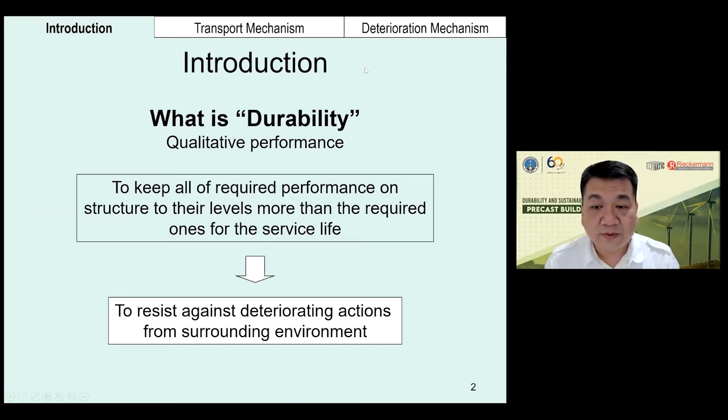So that is my presentation for today, and I hope for a good discussion. My topic today is about the degradation of concrete and steel building. I will start with the term durability. Durability is a term that is used widely, but actually it is a qualitative performance. Durability shows that it is long lasting. To put it simply, it is the ability to resist the deteriorating action from the surrounding environment for the service life of the building, the material, or the system that we want to use.

And this is service life. Service life is the time that we want to use a building, and we want to make the service life as long as possible, but still reasonably economic. The solid line here is the performance that we want to obtain from the building, and the minimum is the minimum requirement for the building. When we use it, there is some degradation, and when the degradation reaches the minimum service requirement, we call it the service lifetime. Sometimes there is premature degradation, so we can repair it. Other times we have to increase the performance of the building, and we call it retrofitting. So this is the common performance of a building during its lifetime.

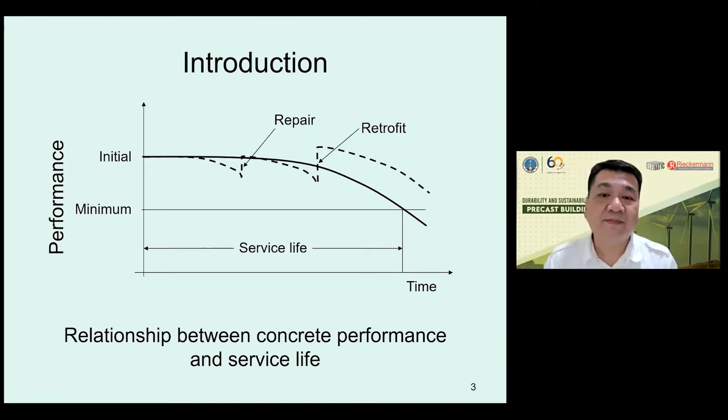Buildings, mainly precast, concrete and steel buildings, are controlled mostly by the concrete. For the steel and connections, including precast connections, we have steel degradation, which I will talk about in the second part. In the first part, I will talk about concrete because it's the main issue. Concrete durability is influenced by two factors: one is internal, from the concrete itself, and the other is external, that is the exposure, such as aggressive agents, the climate, the loading, and others.

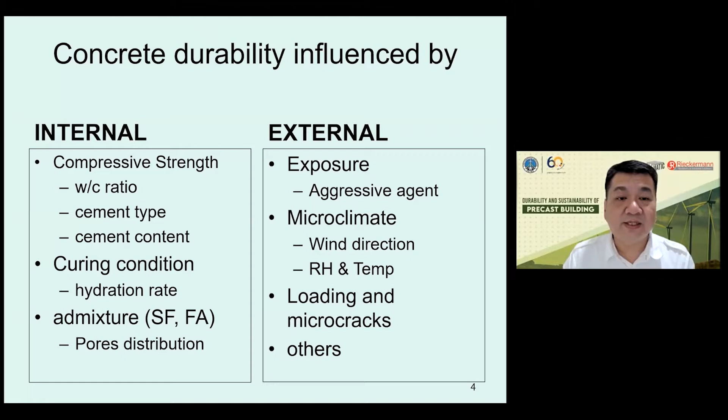This is a very complex interaction. While for the internal factors, it is mainly the compressive strength, because compressive strength is shown to have a high performance in its durability. So we can have a good quality concrete with good strength, with high strength, and then we have good durability. But also during the construction, we can improve the durability by providing a good curing condition and also using some kind of admixture. So this is the basic of what I want to talk about.

And then for the deteriorating action in the concrete structures, or in the concrete member, the concrete member I talk about can be applied to reinforced concrete, precast, or even pre-stressed concrete. So I think it's similar, but with the detail that is different, like the limiting factor. So for the deteriorating action in the concrete member, we have two types of deteriorating action. One is the corrosion of the reinforcement, and this is mostly what we can see in old buildings, where a corrosion stain is coming out of the building. Then we know that the reinforcement had been corroded.

And then the second part that is not so much talked about is the corrosion of the concrete itself. Corrosion in terms of the degradation of the concrete materials. So we have, for example, chemical attack, frost damage, alkali, and then erosion. So this is the topic that I want to talk about, mostly about the basics, so we can prepare our building to resist said deteriorating action.

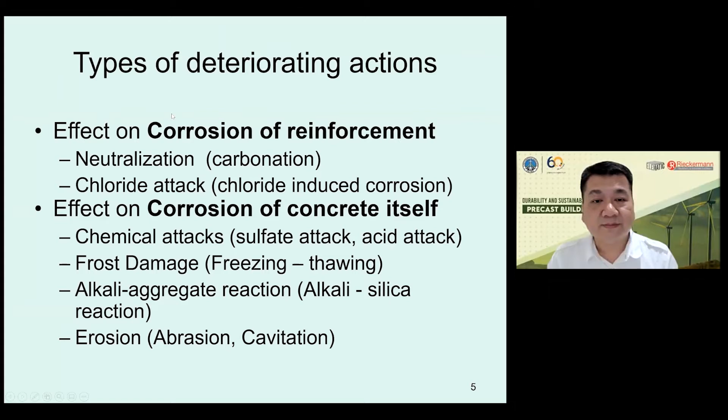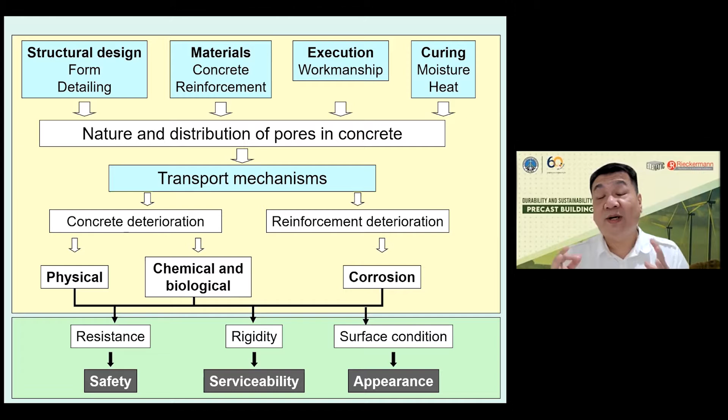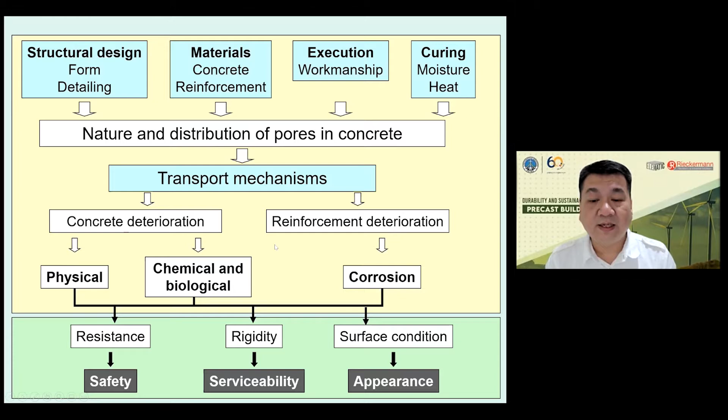When we see the transport mechanism, what we need to imagine is that the concrete is not a solid material. The concrete is like a porous material. So I always say that the concrete is like a sponge, but a very, very hard sponge with many connected pores. And all those pores can be infiltrated by material from outside that can cause corrosion or chemical action or physical degradation. So that is the basic of the deterioration of the concrete structures.

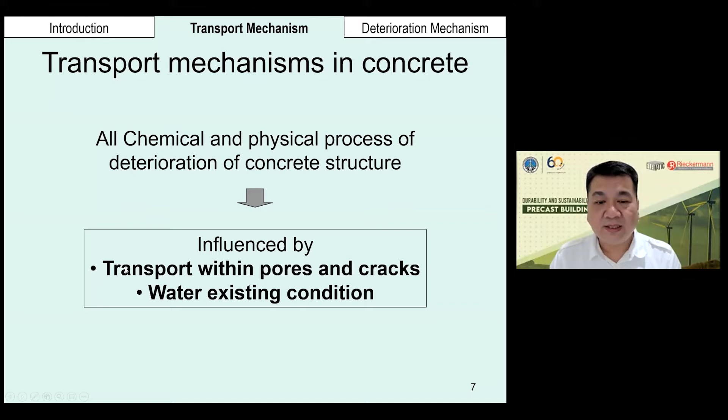Now, for the transport mechanism of concrete, when I say concrete, you can imagine a hard sponge with many pores. The deterioration is normally influenced by the transport within the pores and cracks and the water in the concrete. So just for information, the porosity in the concrete is normally open for a high water to cement ratio. And normally the pores are interconnected. And then 20 to 30% in cement paste, that is the pore in the concrete.

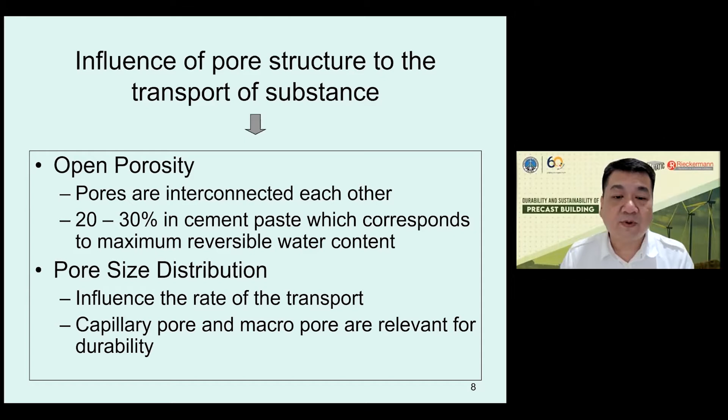And one important thing to notice is the size distribution of the pores. Because when we have a very good concrete, the pores are so fine that the material from outside cannot enter. But normal strength concrete has a larger pore distribution, and the material from outside can enter easily. And this is just the basic for the transport mechanism.

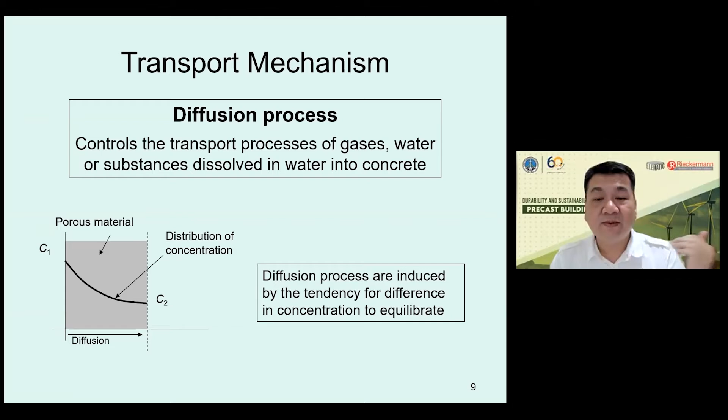We can calculate the degradation process, and there's an underlying equation, that is the diffusion process, but I will not go into detail about it. Diffusion means that there is a difference in the concentration. So the outside concentration is higher than the inside concentration. Therefore, the material will move. The outside concentration could be acid concentration or salt concentration, and it will move inside the concrete and cause degradation in the concrete.

Okay. And the materials that are moving are as follows. Sometimes we have carbon dioxide. It will react with the concrete, and then oxygen also. And oxygen is needed to make steel corrosion occur. So steel, oxygen and water are the main governing process of the corrosion.

And the water always appears because inside the concrete we also have water. Outside the concrete there's water vapor. So this is the transport mechanism in the concrete. This is just

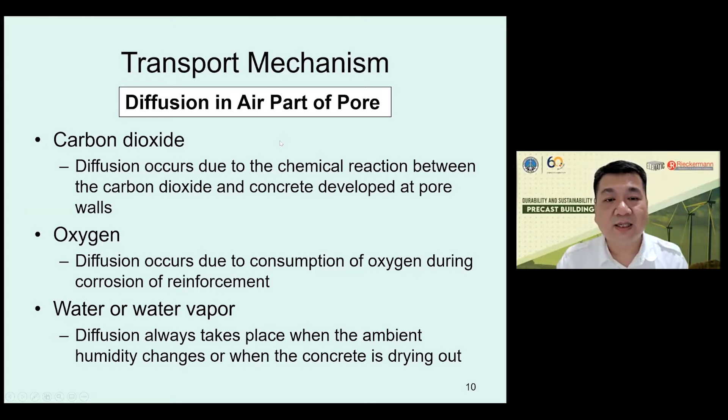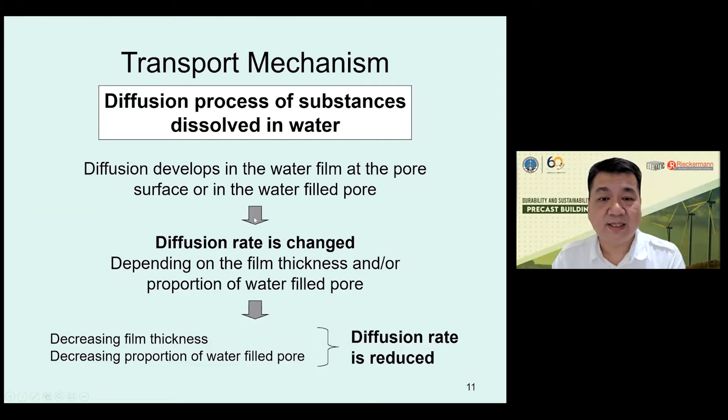information. So the material can be controlled by changing the diffusion rate. The diffusion rate can be changed by making the concrete quality better. So this is just basic knowledge. And this is just a theoretical analysis.

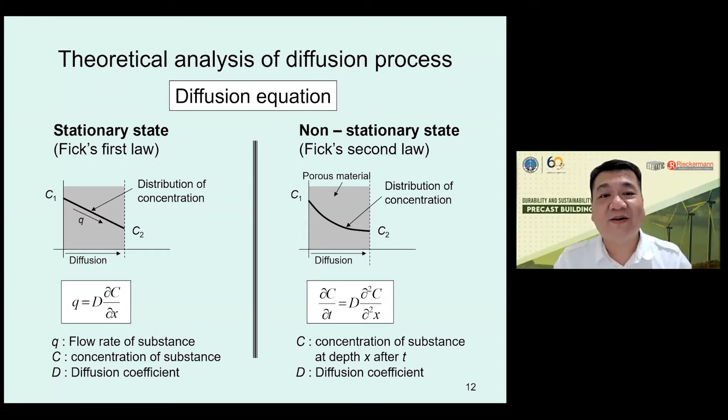So I'm just showing that in the diffusion process, there are two conditions. One is the stationary state, and the other is the non-stationary state. We will use each one depending on the problem that we will face. But yeah, this is still some background of the deterioration action.

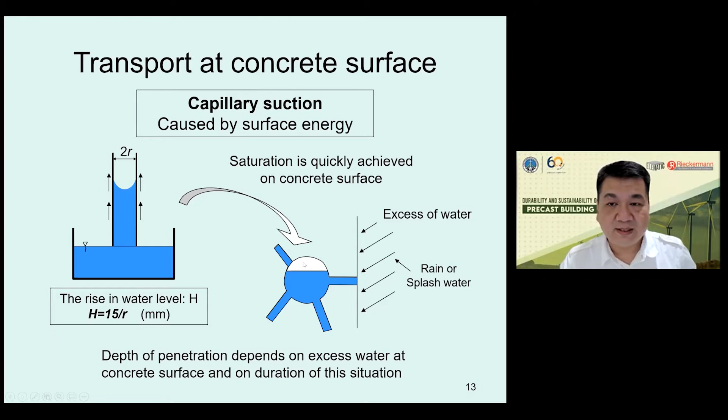So another thing is that the concrete is also like a sponge, so it will soak up material from outside, and it's controlled by the capillary suction. So the capillary suction shows that when you have a dry internal part of the concrete and then there's some water, the water will be sucked by the pores in the concrete. So this is also one transport in the concrete.

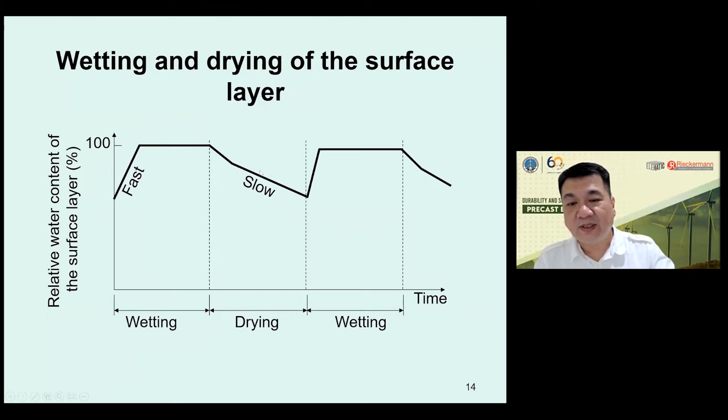So yeah, and then this is the example for the process of drying and wetting. So we have time, and when the concrete gets some water from outside, maybe from rain or from splash water, the wetting cycle is very fast. And then when it's dry, the water will be released slowly. This is an example of that.

So yeah, I want to say that the transport of material in the concrete is a complex process. There is capillary suction, there's hydraulic pressure when there's water outside of the concrete, and then there's evaporation, so there's water transport in the concrete. And that is the process occurring in our concrete. So there's pores, there's diffusion, there is some capillary suction, and then there's some moving of water.

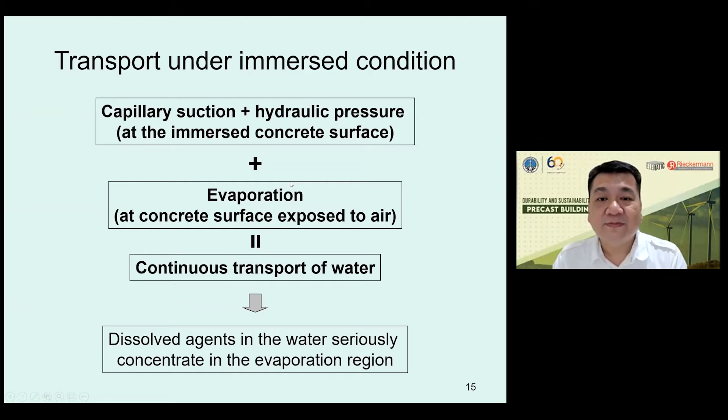That is our concept for our buildings. Even though there is no deterioration, this kind of transport is still occurring in our concrete structures, regardless whether it's precast or cast in situ concrete. So that's what I wanted to talk about. That is the basic for the movement of material in the concrete.

So the next part I want to talk about is the deterioration of rebar in the concrete. When you are faced with durability issues in concrete, this is actually the main factor. The rebar in the concrete is said to be durable, but only up to some time. So this is the deterioration mechanism.

So for new concrete with reinforcement, normally the reinforcement is protected by the concrete. The passive film is like a layer on the reinforcement surface. Due to the high alkalinity of the concrete, we have the passive film. The passive film normally protects the reinforcement from corrosion.

But sometimes the pH of the concrete is reduced by the action of carbonation and leaching out of alkalis, and also chloride contamination can destroy the passive film. So with the availability of water and oxygen, the corrosion of the reinforcement will start. Then we have two types of degradation: one is the reduction of the cross-section of reinforcement, and the other is the cracking and spalling of the concrete. Overall, it will cause the degradation of structural performance.

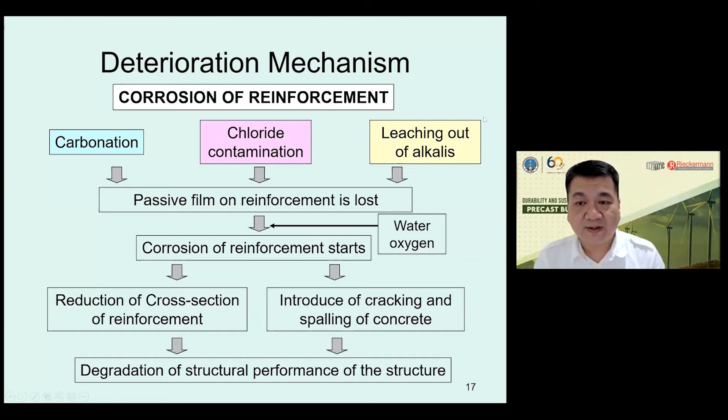So this is the mechanism for normal reinforced concrete buildings. We have carbonation, chloride, and leaching out of alkali. So I will explain carbonation. What is carbonation?

When you have concrete, normally the cement reacts with water, producing C-S-H gel, calcium silicate hydrate gel, and calcium hydroxide solution. The calcium hydroxide is very high in alkalinity, so it protects the reinforcement. And when carbon dioxide penetrates into the concrete, it reacts with the calcium hydroxide, producing calcium carbonate and water.

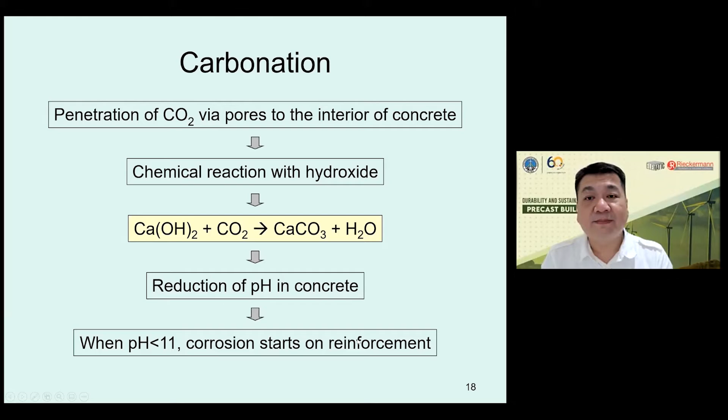With the reduction of the calcium hydroxide content, the pH in the concrete will reduce. And when the pH is less than 11, corrosion will start on the reinforcement. So this is the basic of carbonation. We can calculate the carbonation depth in the concrete with time, depending on the quality of the concrete materials. Normally, the equation follows this type.

Y is the concrete cover, K constant times the square root of time. So we have two conditions: indoor and outdoor, because indoors we have a higher concentration of carbon dioxide. So this is the indoor condition.

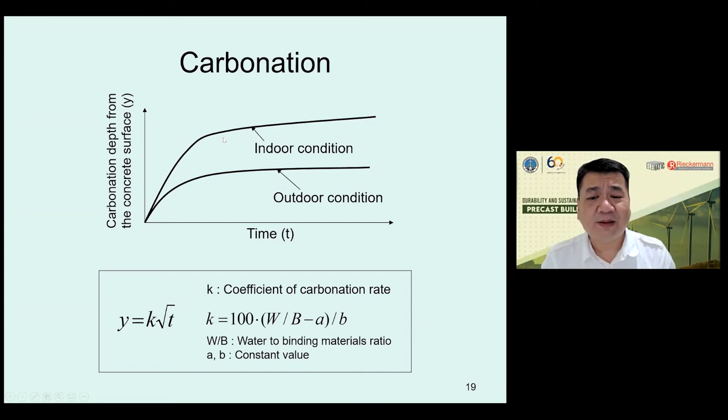So the carbonation can enter more rapidly into the concrete. When the pH is less than 11, the reinforcement will lose its protection and start to corrode. So this is the basic of carbonation.

The distance from the concrete surface is normally called the concrete cover. So when the pH is reduced, meaning on the left part where we have rebar, it will lose the protection of the passive film and can start to corrode. So this is the process of carbonation.

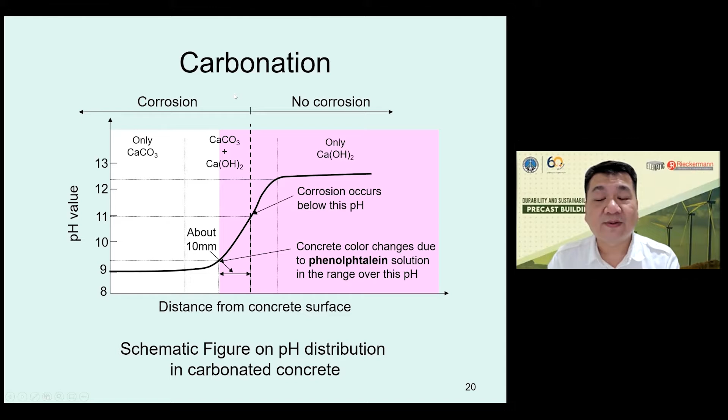Now we can detect the carbonation of concrete using phenolphthalein solution. We spray it on the concrete. When the concrete changes color to pink, it shows there is calcium hydroxide present, meaning this part is still relatively high pH, while the outside is already lower pH. So this is the carbonation.

So when the reinforcement is on the pink side, 1 centimeter from the pink side, showing that the concrete is not yet carbonated, the reinforcement can still be protected. When the reinforcement is on the non-changed color side, we can say that it is not protected by the concrete, and corrosion can start to happen.

Now, another degradation is the chloride penetration into the concrete. The chloride source normally is from seawater or de-icing salt. Chloride is actually a very deteriorating agent in steel. We have steel structures and also reinforced concrete. When exposed to seawater, degradation is normally very fast due to the chloride effect in the process.

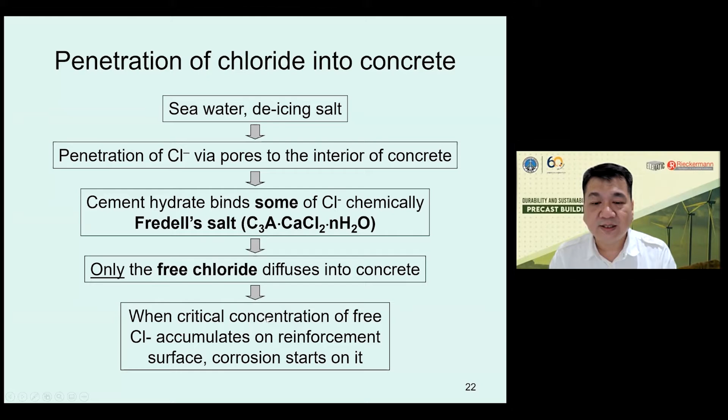The chloride diffuses into the concrete, and when the critical concentration accumulates at the reinforcement, corrosion will start. Different from carbonation, chloride penetration penetrates faster, but we can only find chloride in the marine environment, and maybe in some countries using de-icing agents. The penetration rate of chloride uses Fick's second law.

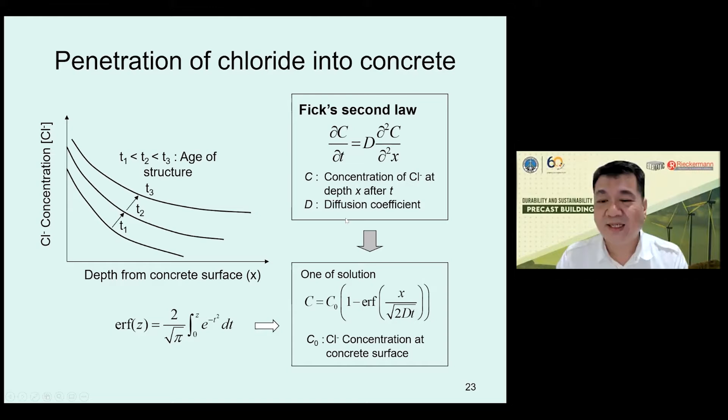This is some theoretical background, just for information. One thing we need to understand is that chloride will cause degradation in the reinforcing bar when it reaches its critical chloride content. There's a standard, the Japanese standard, saying that 0.4% of chloride related to the cement weight can cause corrosion in the reinforcement.

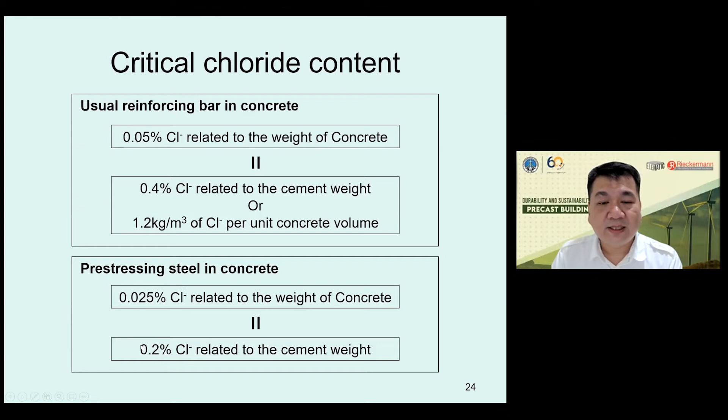This normally translates to maybe 20, 30, 40 years of exposure time. For pre-stressing concrete, it is even lower, the concentration needed to cause corrosion is lower. So this is some information about when the corrosion of the reinforcement occurs, in this case the chloride enters into the rebar.

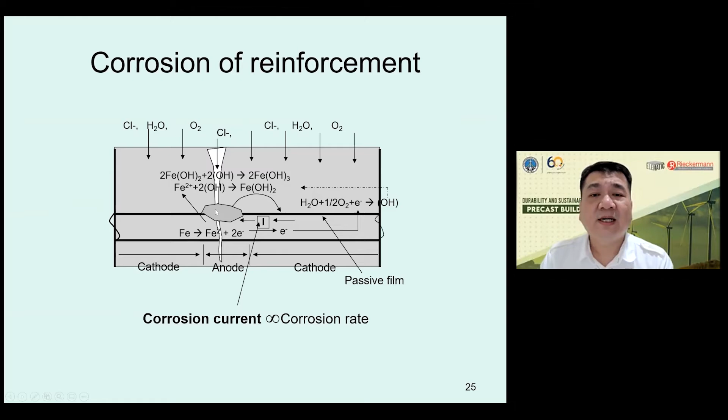So this is the corrosion condition. We have anodic condition and cathodic condition. There's a movement of electrons, and then the rebar will start to corrode. So this is the basic of the degradation of the reinforcement in the concrete.

When corrosion is occurring, we have the steel, and then it will expand. The expansion is due to the change of phase in the material. It normally changes into ferric oxide, and the rust that you see with the red color is normally Fe2O3 with water elements, and it has 6 times the volume.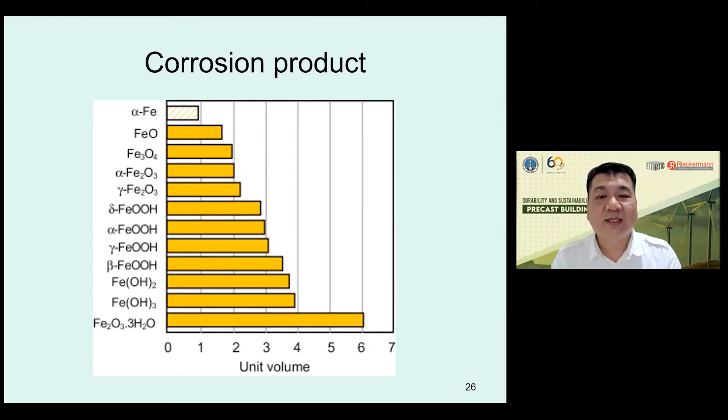So 1 millimeter of steel reinforcement that is corroded can change to 6 millimeters. It's expanded so much. This is actually the cause of why the concrete spalls, why the concrete cracks, because of the expansion of the rust. When corrosion starts, the rust expands, and our concrete will have tensile stress. When the tensile stress is higher than the tensile strength of the concrete, it will crack.

The cracking has two conditions: one is with thin cover, it will spall, and thick cover just cracks, and the rust will come out from that part of the concrete. So we see the basic of deterioration is like this.

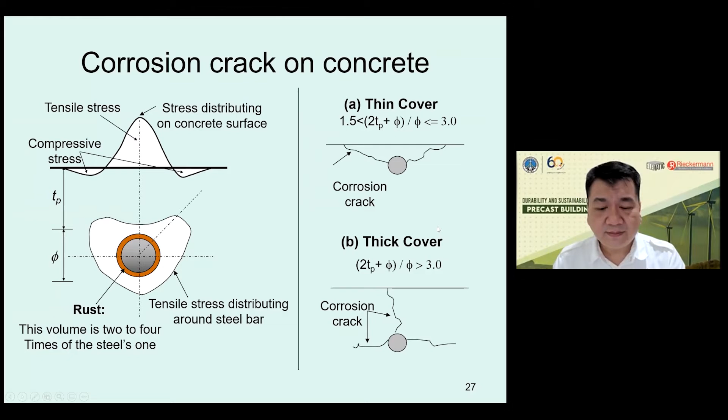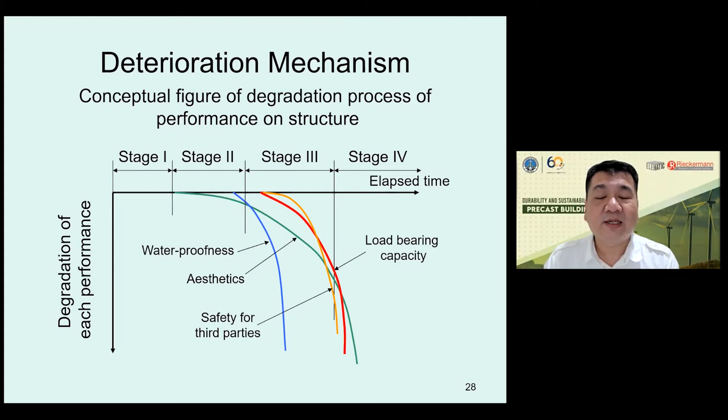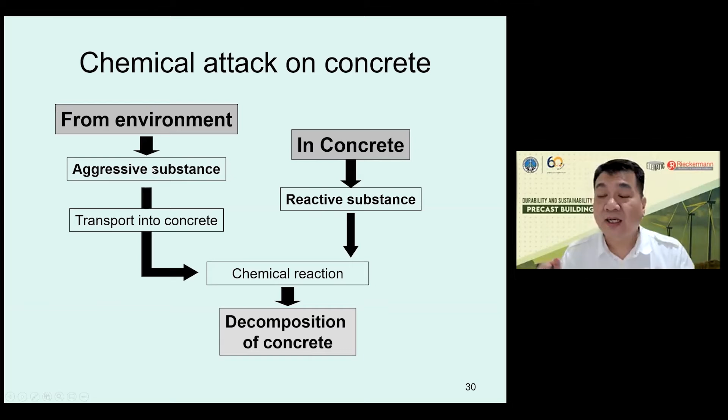Now the second part is the deterioration of concrete. Actually concrete deterioration is quite straightforward: we have attack from the environment and also problems in the concrete itself. When the concrete has some reactive substance in the beginning, degradation will occur - I will show you later. From the environmental side, normally it's due to aggressive substances that transport into the concrete and cause chemical reactions, which is the cause of deterioration. We understand chemical attack on concrete quite well now, so we try to use good quality material and limit the aggressive substances reaching the building. This is the knowledge you need to prepare your building.

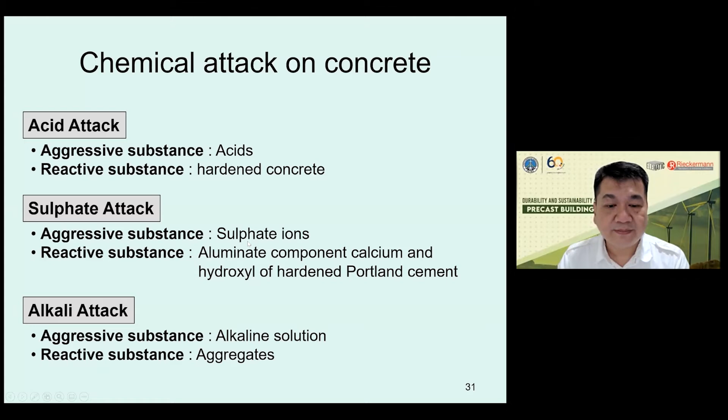When chemical attacks happen on concrete, they can be divided into the following conditions: acid attack, because acid is also a good agent to destroy your building - the reactive substance is the hardened concrete, meaning the whole concrete part will be destroyed by acid. Another is sulphate attack - sulphate comes from seawater, and some soil also has sulphate. Sulphate attacks the aluminate component in Portland cement, so aluminate reacts with sulphate. The other is alkali in the concrete reacting with the aggregate.

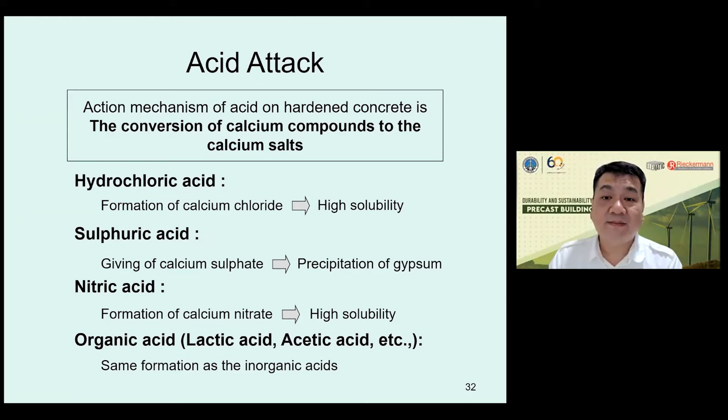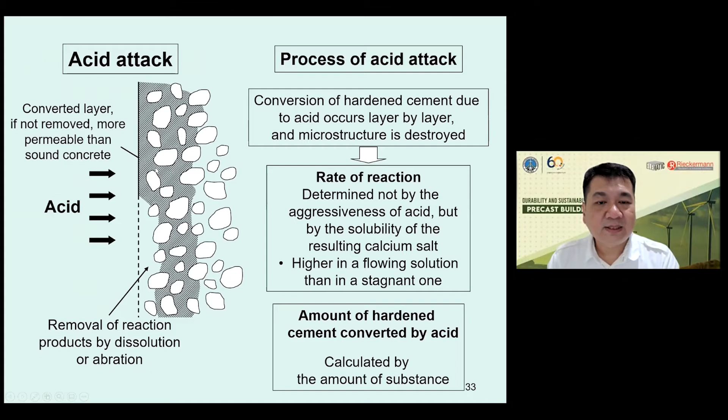For acid, there are many types we need to understand: hydrochloric acid, sulfuric acid, nitric acid, and organic acid. Normally buildings face organic acid from oil spills, and other acids like cleaning solutions also fall in this category. These convert the calcium compound of the reacted cement into calcium salt. This is the schematic - acid exposed to our building will convert the entire layer of hydrated cement. This is the acid attack.

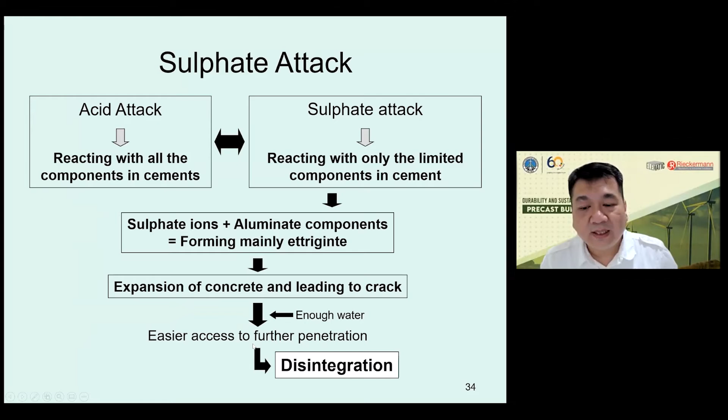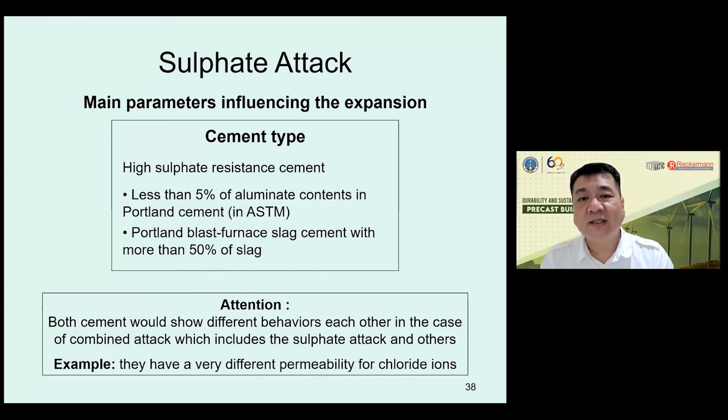This is actually the basis for cement used in the marine environment. The limiting factor is the water to cement ratio - we reduce it to 0.5, which is the Japanese standard. So this is sulphate attack, and then cement type matters too. Sulphate attack is a degradation factor in concrete because for acid we try to protect against it, but for sulphate, we still have buildings exposed to it.

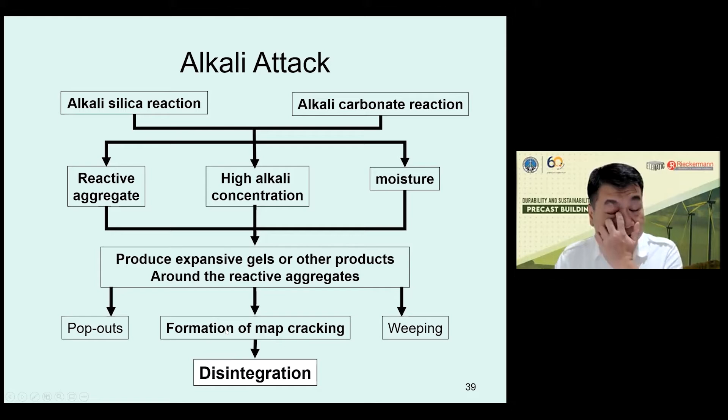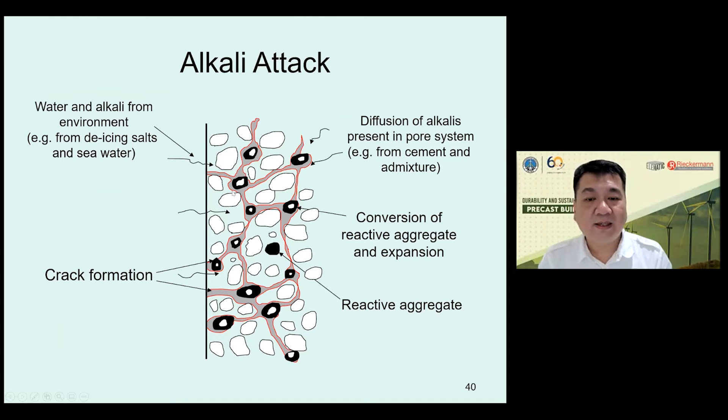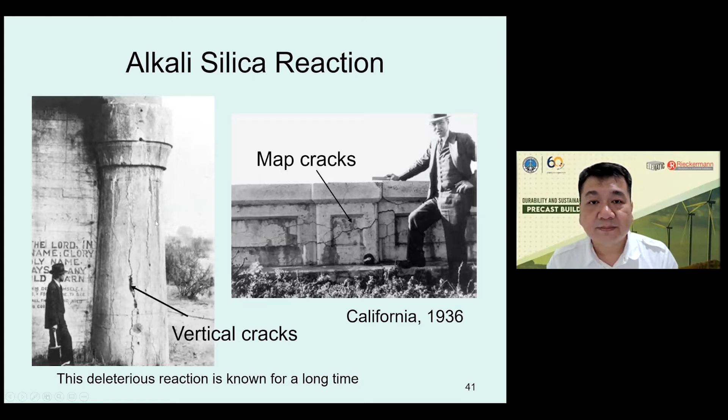For alkali, we have alkali-silica reaction. Silica means the aggregate contains silica, and carbonate means the aggregate contains carbonate, like limestone. With reactive aggregate, high alkali concentration, and moisture, it will expand and cause map cracking in the concrete. The process is like this: when alkali from inside the concrete reacts with the aggregate, it expands and causes cracking. Alkali-silica reaction is a very old condition because we have many concrete structures that have this cracking. This kind of map crack is the alkali-silica reaction - there's also some leaching of alkali in the cracking.

So that is the deterioration of concrete. Now, for the steel structure, this is quite common - from the steel structure we can see the connection with the precast, like the joint of the precast member, mainly using steel, so it's also related to steel. For steel superstructures, there are many typical damages: deformation, distortion, collision, connection damage, and tightness issues. This is related to the steel design, the construction, and the maintenance process of steel structures - mainly mechanical damage. Another part is the coating, when we coat the steel with some paint.

Another steel corrosion protection method is galvanizing. So galvanizing is also some kind of corrosion protection.

When we use the building, we have the fatigue condition. Fatigue is like the cyclic loading in the concrete, and we also have a fracture condition with overloading and cracking. Cracking is similar to fractures.

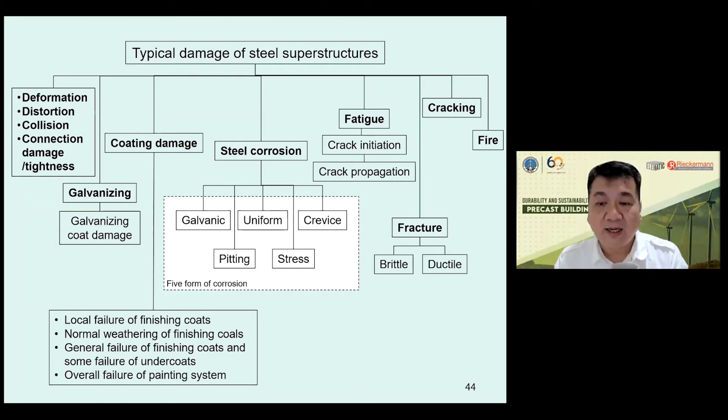So there are 5 types of corrosion: uniform, galvanic corrosion, crevice, pitting, and stress. I think the ones most related to precast structures are galvanic corrosion and crevice. Crevice is the corrosion occurring on the unprotected part of the steel. I will explain it later.

For the coating, this is also related to precast, I think. Normally for the steel building, we see a local failure of finishing, meaning scratches or some impact will make the finishing fail. Normal weathering is fine because then we can just reapply the finishing, but there's also some failure of the painting system.

There are some tests also to check this. It's called the holiday test. Normally we use some sensor and check if there's any exposed surface.

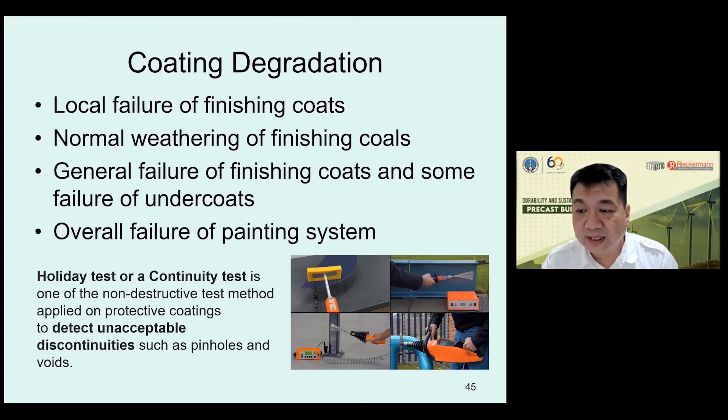For uniform corrosion, we can protect it using coatings, plating, galvanizing, or anodizing, or using corrosion inhibitors, or even using anodic protection. Or we can just increase the thickness of the structural member.

Then there's pitting corrosion, which is when localized corrosion occurs and causes damage deeply inside the steel, causing holes. There are many types of corrosion, and normally due to the process of making the steel, the process is not quite uniform, and you get some local condition. So the material needs to be selected very well.

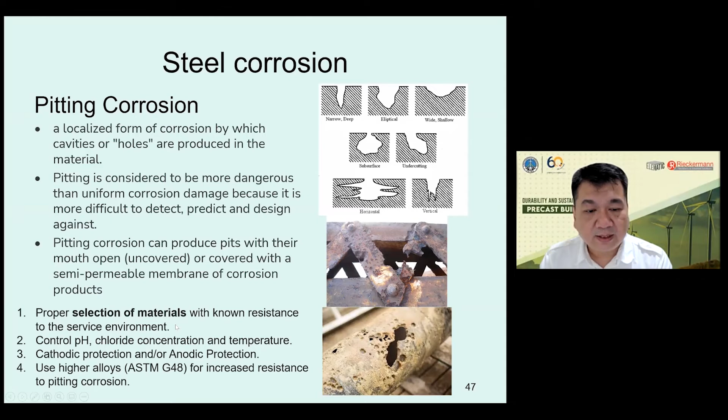For stress corrosion, we hardly see this, but it's knowledge we need to know. Stress corrosion normally occurs on the tensile phase of the steel, and when tensile stress is occurring, aggressive substances can enter the steel and cause corrosion. It also occurs at high temperature, so for boilers, stress corrosion normally occurs.

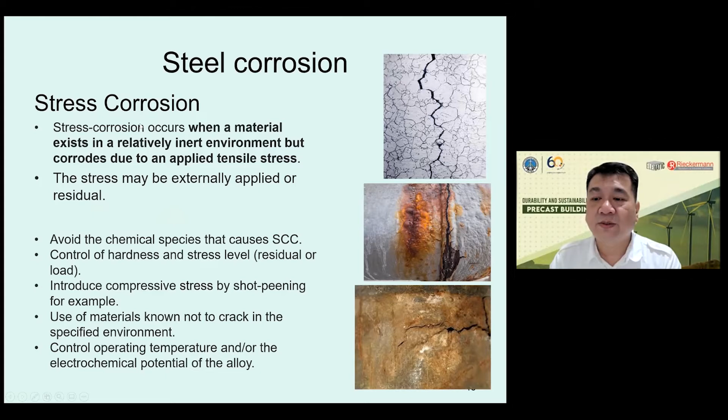For precast connections, I think the one we need to pay attention to is crevice corrosion. Crevice corrosion is the condition when there's some shield or plate outside of the steel. This occurs because when we have a condition protected from the outside, the water there cannot dry out, and with some salt, it causes a very high acidic condition and pitting. So this happens when we have two parts of concrete or steel plate with a gap between them - water can enter and corrosion can occur.

This is the most important corrosion process, I think, in our steel and concrete connections. That's why we need very good filling material and grouting, so we can avoid the occurrence of water pooling in this part. We need to fully drain it, which can reduce the corrosion.

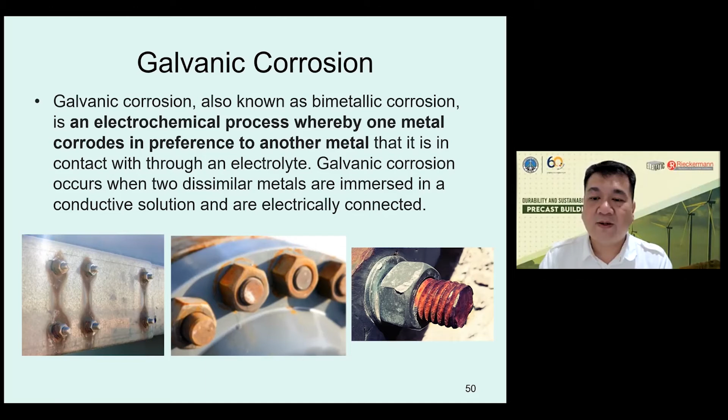So I think for the precast member, the galvanic corrosion needs to be considered very well, because different types of metal will have different corrosion potential. Of course, this condition occurs when there is water and oxygen. So one thing that we are trying to do is also ensure that our connection doesn't have water and oxygen by filling the connection with grouting. So that is called the rigid connection.

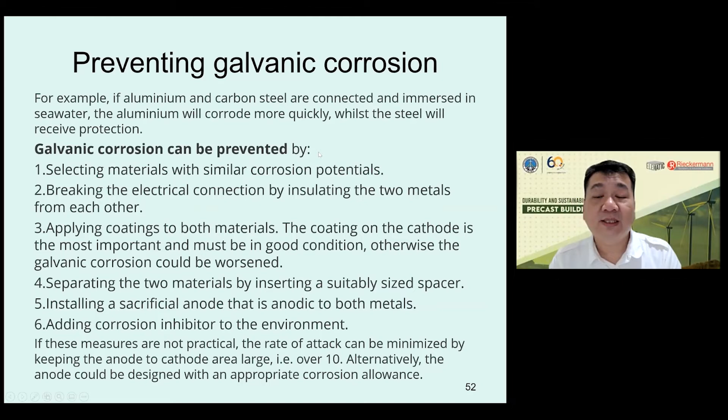Yeah, for galvanic corrosion, we can prevent it by using a material that has similar corrosion potential, or breaking the electrical connection. So we have to separate using some plastic, coating, spacer, and the like. Or we can use a sacrificial anode, or corrosion inhibitors. So yeah, galvanic corrosion, I think, is main knowledge that we need to have for the precast concrete connection.

So I think that is my presentation. And to recap, durability is a factor we need to consider besides strength and workability when we are making a good building. And then internal and external factors need to be considered. And the mechanism of degradation we need to understand so we can make good concrete. I think that is my presentation.

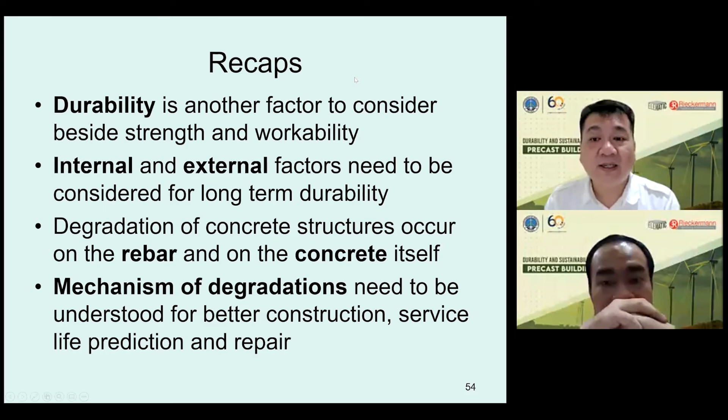Okay. Yes, for the first question, stainless steel for structural steel, even for reinforcing bar, I think has very good potential to be used as the rebar, because stainless steel has a very high corrosion resistance, of course with the extra cost. And then normally we just use it for structures that need to perform well for a very long time.

And then for the galvanic corrosion, I don't think there's a problem with steel, because when we have steel in the concrete, the same behavior will occur. And why reinforced concrete has problems is due to the corrosion of the reinforcement. When the reinforcement does not corrode, I don't think we have any problem, because the problem of corrosion in reinforced concrete is the cracking of the concrete due to the corrosion expansion. When we don't have that kind of process, there's no corrosion in the stainless steel.

So I think we will have a very good long-lasting building, but of course the cost will be very expensive. And previously there is one technology called epoxy coated rebar being used, because epoxy coating on the reinforcement can protect the reinforcement from corrosion. But after 20-30 years of evaluation, the problem with epoxy coated rebar is the construction process will cause some part of the coating to be damaged, and then the protection is gone. So we have problems also.

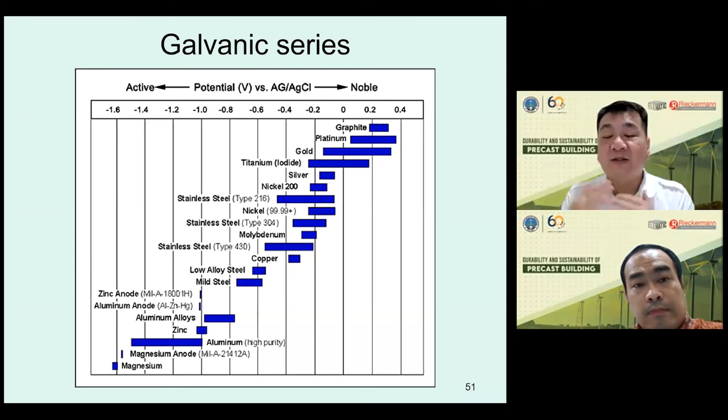But for stainless, I think it could behave very well. But one thing that we need to understand is how the connection from stainless steel to other materials behaves. So when you have stainless steel as the main rebar, and then you have mild steel as the bolt, all the knowledge will say that the bolt will have some corrosion, because the stainless steel inside is so much. The cathodic area is larger than the anodic, so we'll have corrosion. But when we use stainless steel, and the connection is also stainless steel, then there should be no problem. I think that is the answer for the first question.

How do we monitor and judge the corroded rebar and steel structures? I think that we need to see the standard also. Normally, this is still engineering judgment. We need to see what is the extent of the condition. So when there's cracking and spalling, I think that is the indication of the severity of the problem. But when there's no cracking, we still can measure the corrosion with some potential measurement, and then we can estimate the risk of corrosion. But the second question, I think, is a topic that needs to be discussed further. That's my answer.

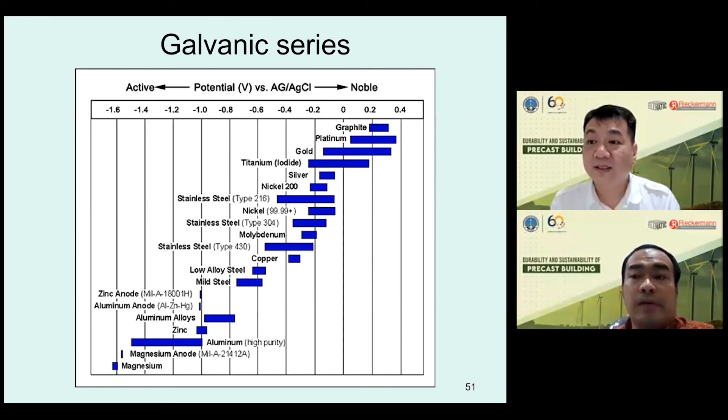Okay, thank you, Professor Antoni, for the answer. In addition, I want to add for the stainless steel, I think we need to also look after the development length of the rebars, because stainless steel has less bond compared to normal reinforcement. So the stainless steel or the epoxy coated reinforcement will need a longer development length into the concrete, so that it can develop the full yield strength or tensile strength. I think that is one consideration that we need to pay attention to when using stainless steel or epoxy coated reinforcement.

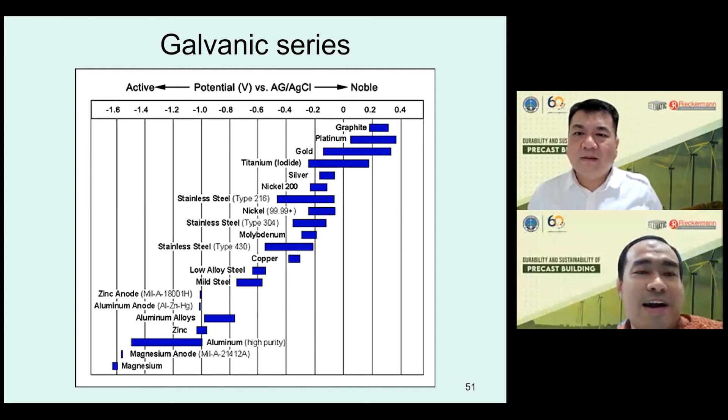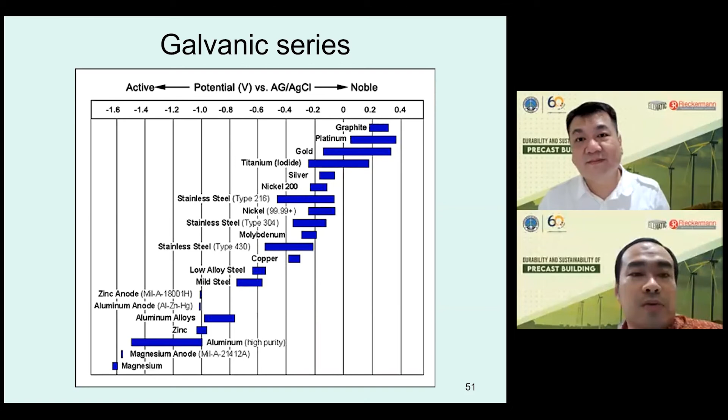And then for the second question, I agree with Professor Antoni that it's very difficult. Let's say we have corroded rebars, and somebody asks how many percent of the strength is left, it's very difficult to answer because it's a combination of many factors, and we need to do a lot of assessment before we can come up with the solutions that are needed for the retrofits.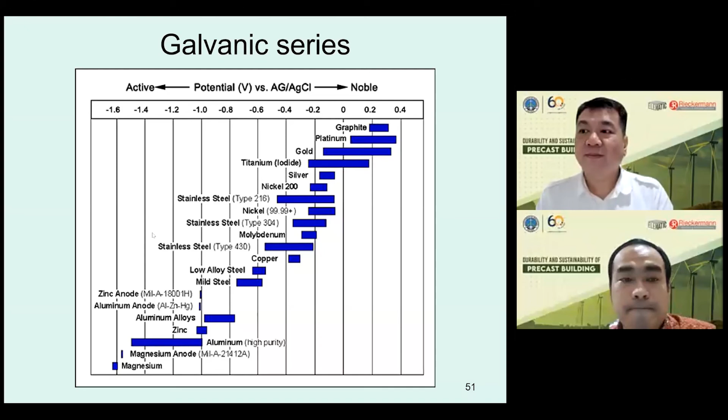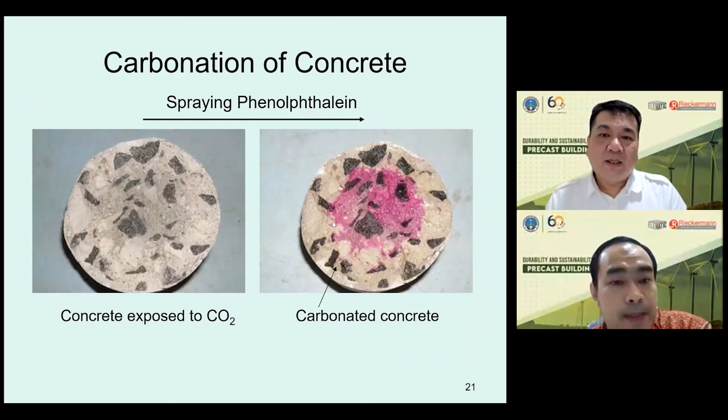Yeah, for the building, I think most of the problem is due to the water infiltration. So when we can avoid this kind of problem, I think we will have good durable structures, but sometimes we still have to face it.

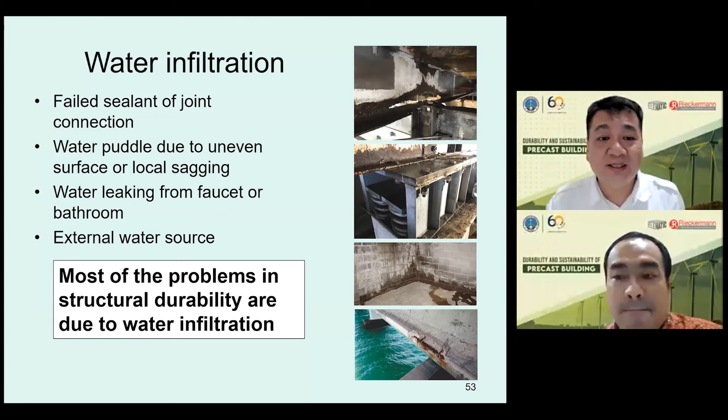Okay. So the next question is from Mr. Hassan. The question is, which one is better in the marine environment, non-fly ash concrete or ordinary fly ash concrete with the same specified concrete strength? Okay. This is quite a difficult question because it depends.

In the marine environment, the problem is with the hydrated tricalcium aluminate. The tricalcium aluminate content in the concrete is causing the sulfate attack. Normally in the marine environment we have sulfate attack, and the sulfate will attack the tricalcium aluminate. So concrete with fly ash or without fly ash, I think there's similar tricalcium aluminate there, so the response will maybe be the same.

But then again, when you are replacing some part of the cement with fly ash, the content of cement is lower, so it could be beneficial to use fly ash in the marine environment, because the content of tricalcium aluminate will be relatively lower. That is the answer. But with the same strength, with fly ash or without fly ash, I don't think it will matter too much. I think that is mostly due to the tricalcium aluminate content.

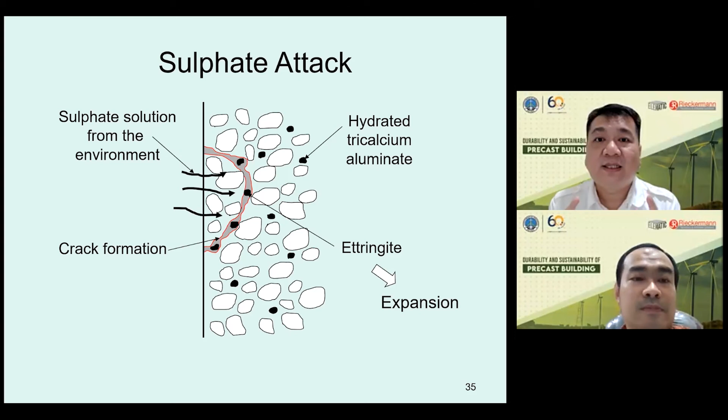Okay, thank you, Professor Antoni, for the answer. In relation to the question from Mr. Hassan, I also want to ask, is there any beneficial effect when we add silica fume to the concrete for the marine environment? Could be, because when we are using silica fume, we try to make the concrete denser. But silica fume is very expensive, and I don't think it's beneficial to use silica fume for concrete with compressive strength lower than 80 megapascal.

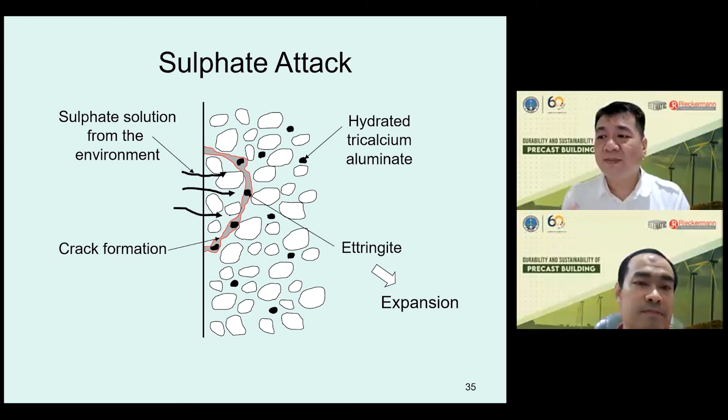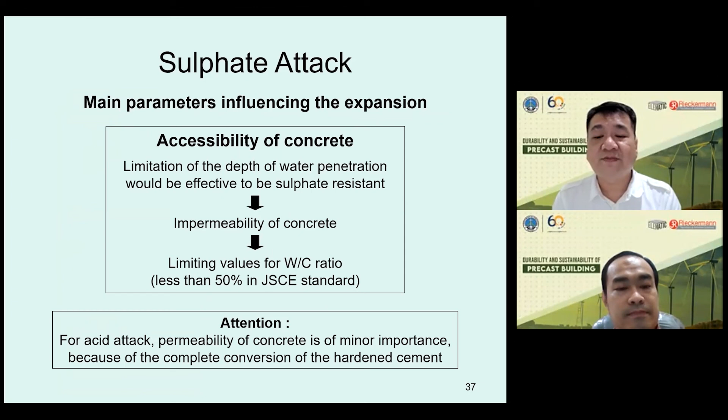So the use of silica fume can be beneficial, but that is too much cost, I think. It's better to use additives to reduce the water cement ratio. So this is one answer, limiting the water to cement ratio lower than 0.5. For the standard it is 0.5, but now we can make a 0.4 water to cement ratio, which I think is already very good. So with fly ash or without fly ash, when we reduce the water to cement ratio, we provide better protection.

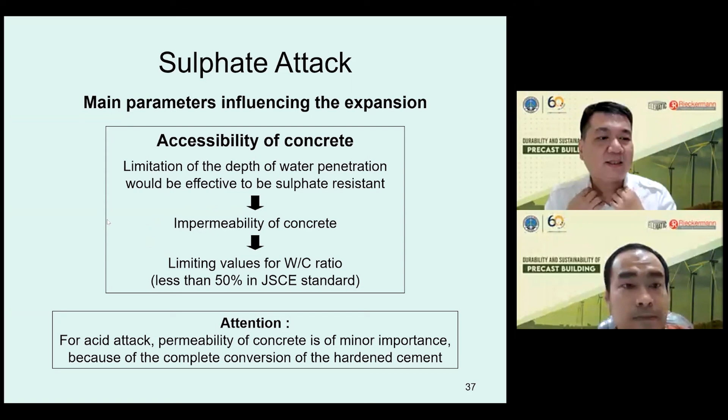Okay, thank you, Professor Antoni, for the answer. Are there any more questions from the audience? Maybe those of you who want to ask questions directly or discuss some topics with Professor Antoni. Maybe some students who want to ask about the durability of concrete.

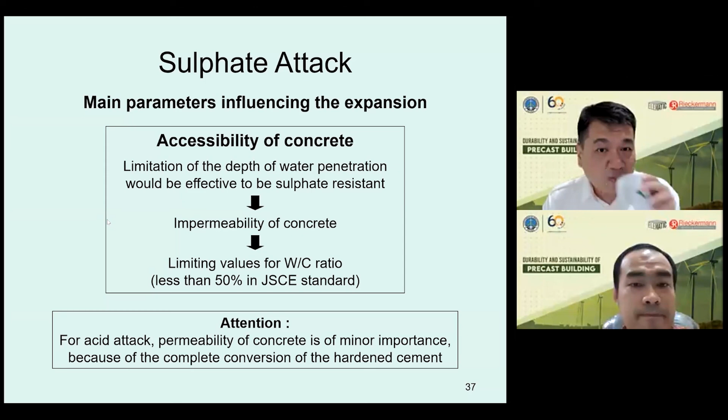Yeah. Yes, is there? Okay. It's already late afternoon. This is a weekend, so okay.